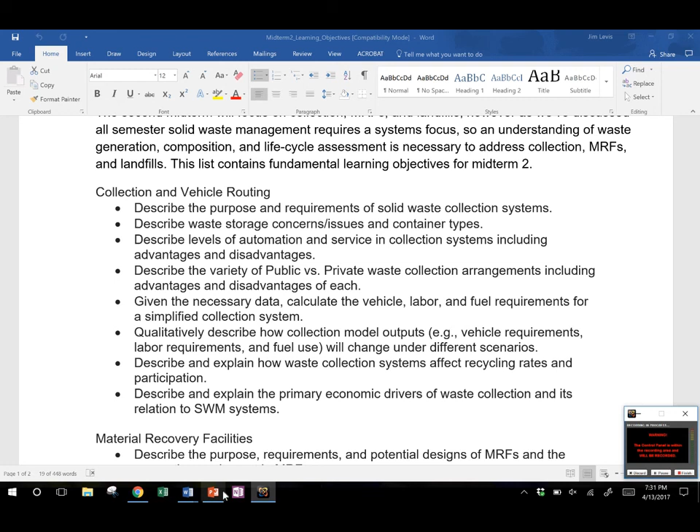The next question was on the actual practice midterm, question 4. Most refuse collection vehicles use diesel fuel for their engines, however many trucks have recently switched to using compressed renewable natural gas produced from landfill gas. So using life cycle assessment, explain how you determine whether this makes sense from an environmental perspective.

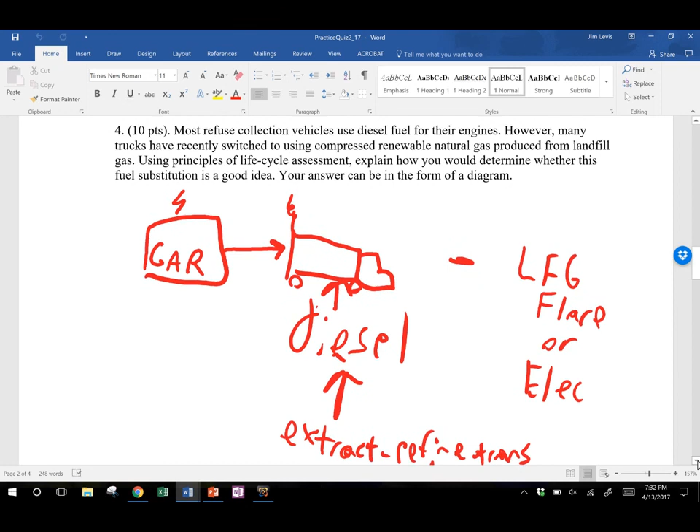It doesn't say that, but that's what we're thinking. Your answer can be in the form of a diagram, which is what we expected. So basically you want to draw the two different systems: we have our diesel vehicle, and there's some sort of garage.

For the collection system, the vast majority of the emissions are going to be fuel related. You are going to have a garage, which is going to have some electricity emissions, but then you have this diesel vehicle, which is going to have emissions from combusting the diesel. The diesel itself is produced by extracting, refining, and transporting crude oil.

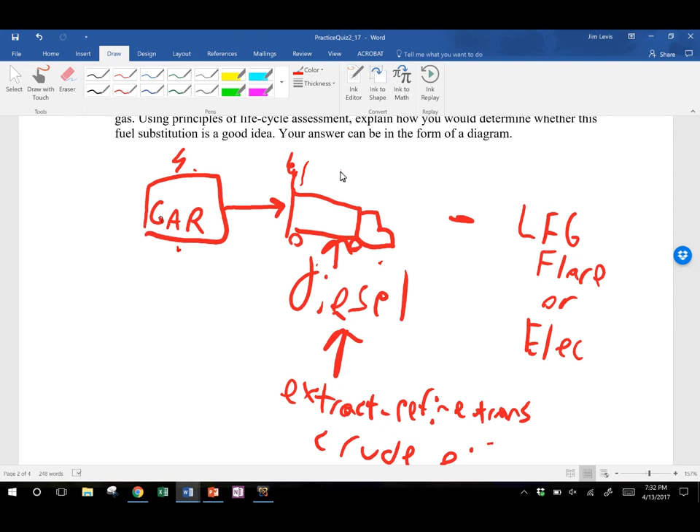Crude oil. So let's go to our other system real quick. Basically, in our other system we have the same garage, we also have a truck, and we're going to have some airborne emissions.

Those emissions are going to be different because you're burning compressed natural gas, so you're going to have less SOx emissions, less CO2 emissions, perhaps more methane emissions. And the CNG is going to come from the landfill.

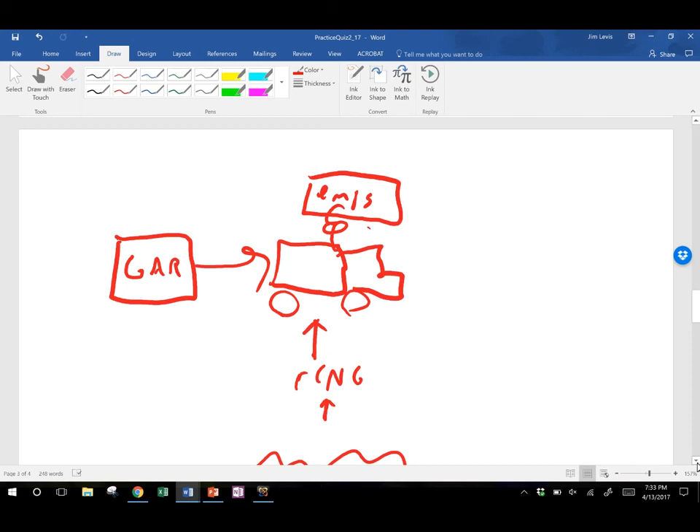This is important to think about your system boundaries. The landfill gas is going to be produced whether or not you make renewable CNG from it. So the landfill gas isn't part of this system—it's only the things that change.

So really, your gas collection system wouldn't change, and the only part that's going to change is the conversion of landfill gas to renewable CNG—you need to knock out the CO2, maybe some moisture, things like that, and clean it up. So you're going to start with what's really just a cleanup process.

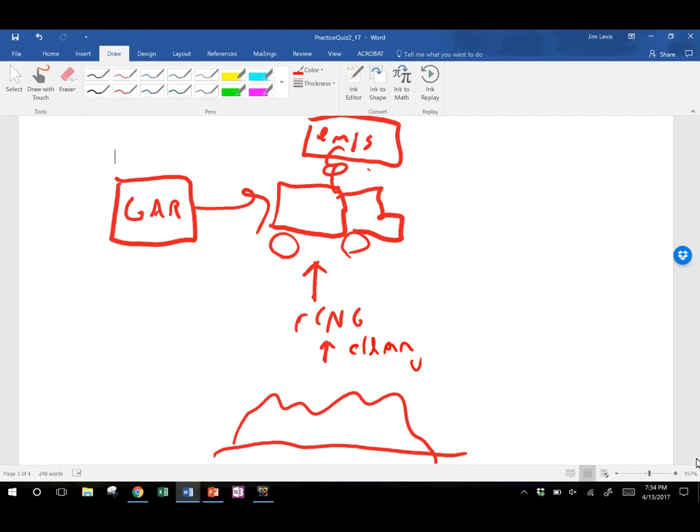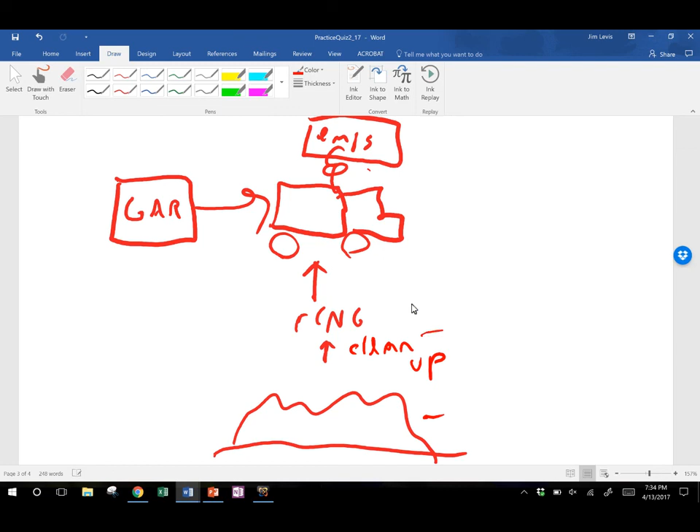The other thing you need to think about is what was happening to the landfill gas in the other system. Now we have this additional function where this system is treating our landfill gas, so we need to look at, in our diesel system, what would be happening to that landfill gas if we weren't turning it into renewable natural gas.

The two major options are, as usual, you could be flaring the gas, or more likely you'd be comparing it against another way to produce energy from it. If you're looking at producing renewable natural gas, you're probably already considering electricity production with the gas, so one of these two things is going to be an offset, essentially.

So for this diesel system, you're going to have the diesel's production, and the landfill flare or the electricity—your landfill gas is going to be treated with a flare or electricity, and the electricity would then have its own offsets associated with that. But the basic idea is that in this diesel system, that landfill gas still needs to be included, so you need to include that benefit as well.

The emissions associated with flaring the gas would then be added to this system in this offset way, because in this system your two functions are collect waste and manage landfill gas. You could do a subtractive function and then subtract these from the other one as well, from the renewable CNG one.

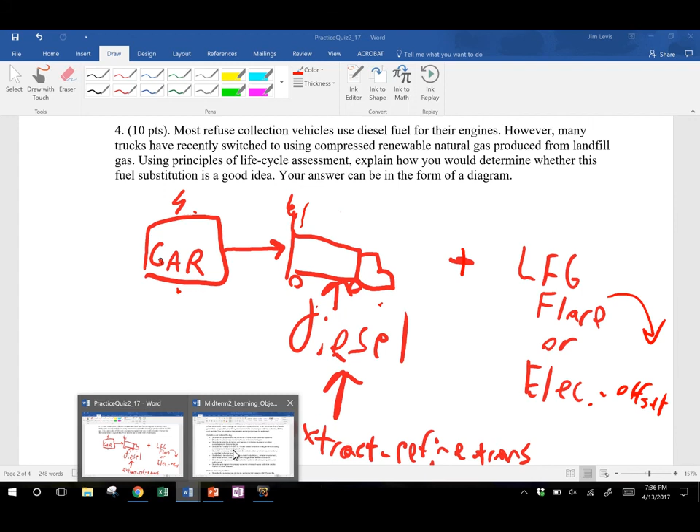The next question was on the learning objectives, trying to clarify this section: name and describe the stages of anaerobic biodegradation, be able to draw the diagram. This is specifically referring to the stages of waste decomposition in landfills: the aerobic phase, the acid phase, the accelerated methane phase, the decelerated methane phase, and the final stability phase. That's really what we're looking for there.

The other one is a bit unclear, but you should be able to do both. The stages of anaerobic biodegradation go from hydrolysis to fermentation to acetogenesis to methanogenesis, and you should understand how those all interrelate and be able to describe how those different stages work. That was a little ambiguous, but there were figures in the presentations on both, and on the midterm it will not be ambiguous which one we're talking about - we will be very explicit.

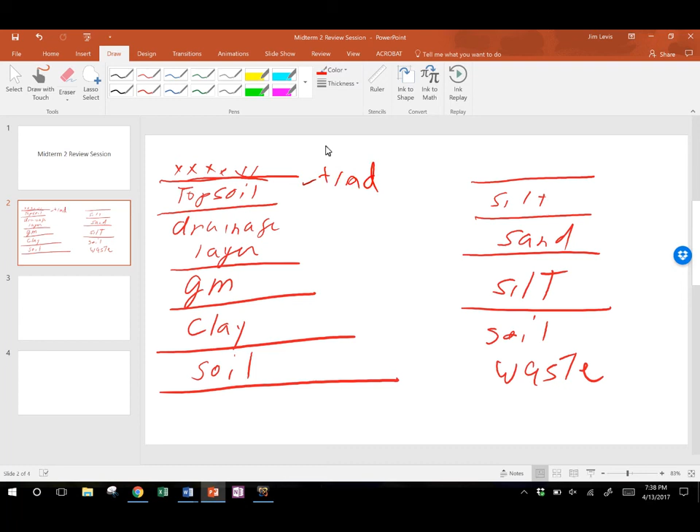The next question was on being able to draw an ET cover versus a traditional cover, related to the question on the practice midterm. This is essentially what a traditional cover looks like: you have this clay, a geomembrane, and a drainage layer on top of that, and your whole plan is to seal water from infiltrating your waste, which sits down below.

On the ET cover, basically you have this silty layer, and the whole idea is to get the soil to store the moisture until it can evaporate. These evapotranspiration covers use a silty layer that holds moisture, so you use them in arid environments. Sand, when saturated, lets water flow easily into the second silt layer, but when sand isn't saturated, moisture flows pretty slowly, so it can still evaporate.

So basically the whole ET cover uses a large amount of different types of soil in order for the moisture to evaporate before reaching the waste. These final soil layers sit on top of the waste and can be compacted easily, giving you a foundation that you can use to build up your other layers.

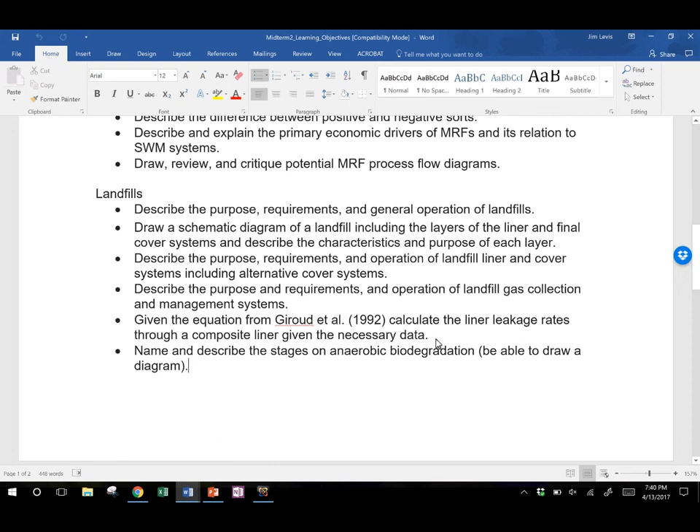The next question was on the learning objectives, basically trying to describe - and you can also show on a diagram - how pH, COD, BOD, and methane production vary through time in the stages of anaerobic biodegradation or waste decomposition in the landfill.

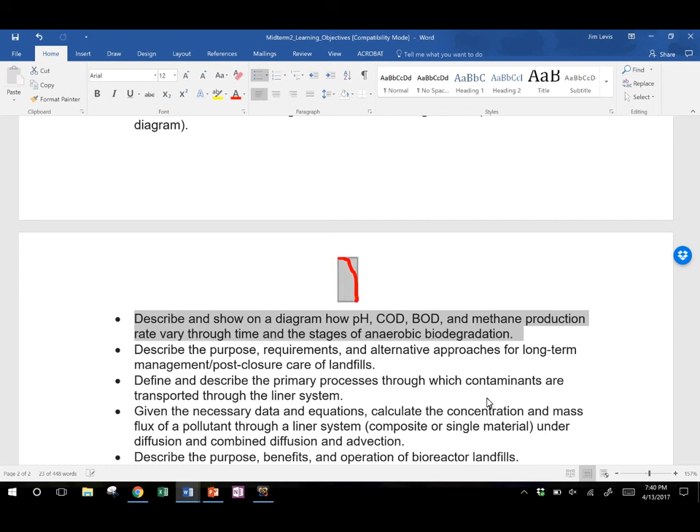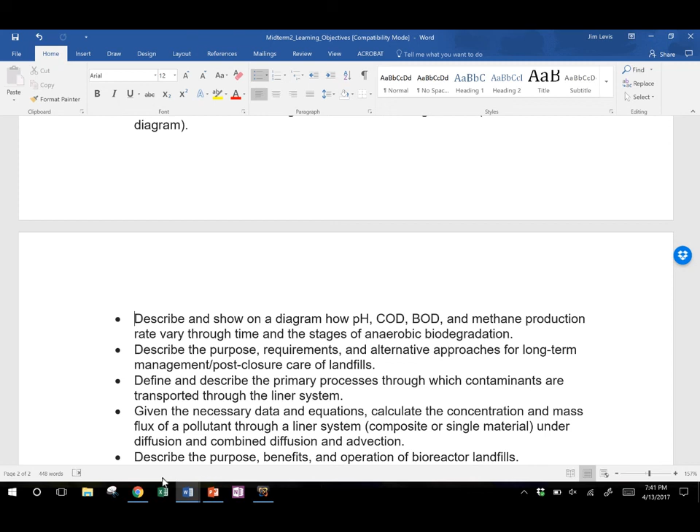Basically the idea is that for a while your acids are going to start to accumulate as you have hydrolysis and fermentation. The methanogens are going to be inhibited whenever the pH is very low, and the pH is going to be very low during hydrolysis, where the soluble monomers are broken up. Let me open this one up so we can go to the slide.

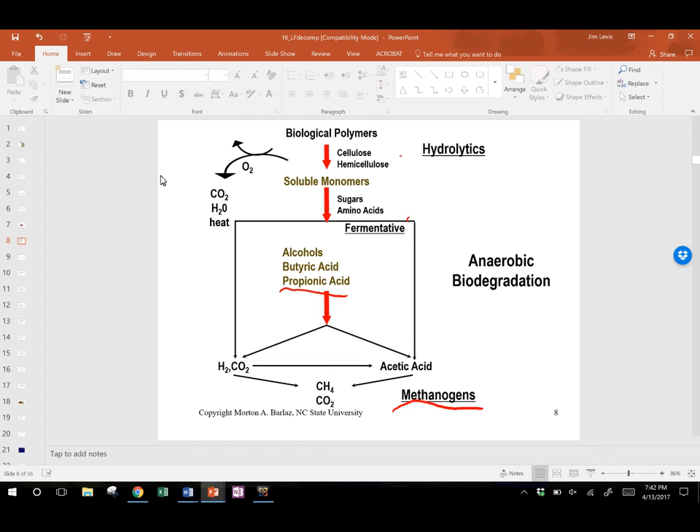It's all related to this: the idea is hydrolytics happens quickly, fermentation happens quickly, and that's going to lead to a buildup of these acids - butyric acid, propionic acid, carboxylic acid - which lowers the pH. While the pH is low, methanogenesis is inhibited, and it slowly starts up. As hydrolysis goes on, that raises your BOD and COD as you break down these biological polymers into soluble substrates to further reduce.

So that's what's happening here in your different phases: acids accumulate, and as you can see, methane production doesn't really start until that pH bottoms out. Then, as the methanogens start to consume the acids, your methane generation rate goes up and the acids are being consumed, so your pH goes back up to near neutral. During this consumption, your COD and BOD are being consumed and start to go down, hitting their peak right when the pH hits its low point.

Basically, the acids accumulate, which reduces your pH. Then methanogenesis really starts going, consuming the acids, which gets you up to a neutral pH and up to the maximum methane yield, and also starts eating away at your BOD and COD.

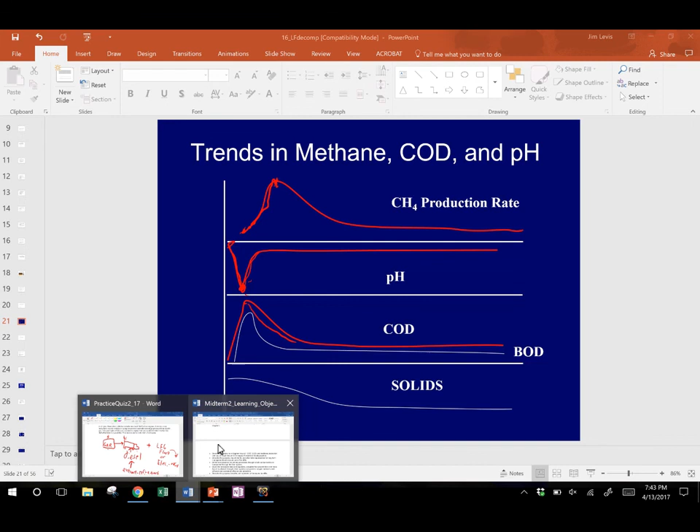The next question was on MRFs. The idea being, the question was - hold on.

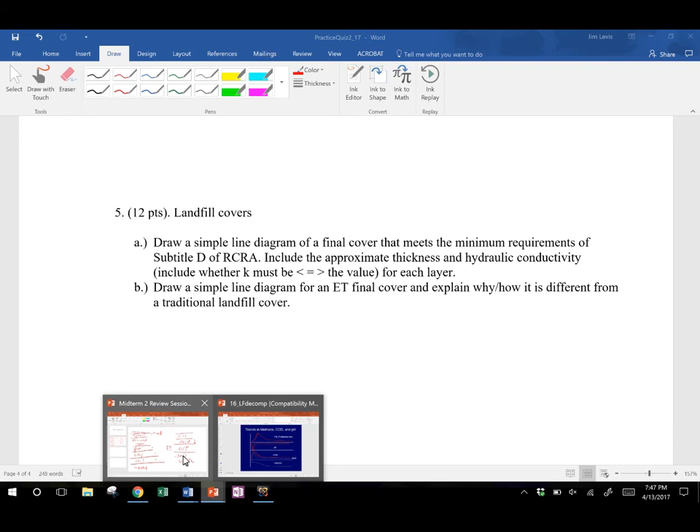Another student asked about the practice midterm, question 5, which says include the approximate thickness and the hydraulic conductivity. In the midterm it'll be clarified that only the required K values are included. The only layers that really have K requirements are your clay, which has to be less than 10 to the negative 7th, and your drainage layer, which has to be greater than 10 to the negative 2nd.

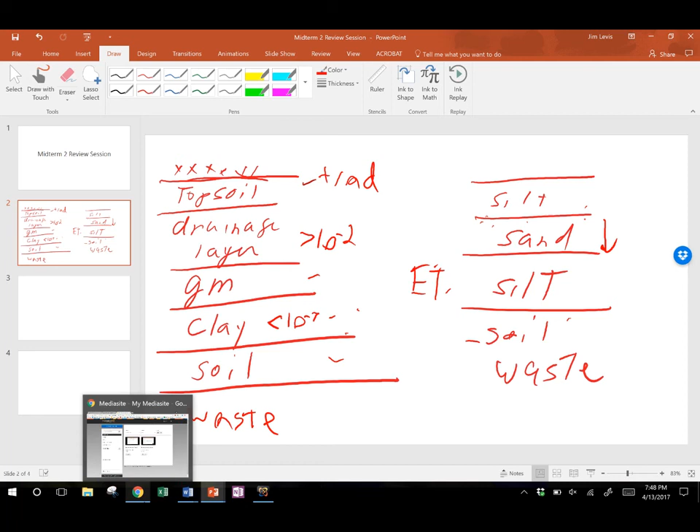This is the cover, but it'll be the exact same on the liner as well for your drainage layer and your cover. Your geomembrane is going to be significantly lower than the clay, and the other layers don't have requirements associated with them. So that's all you'd really need to know associated with that.

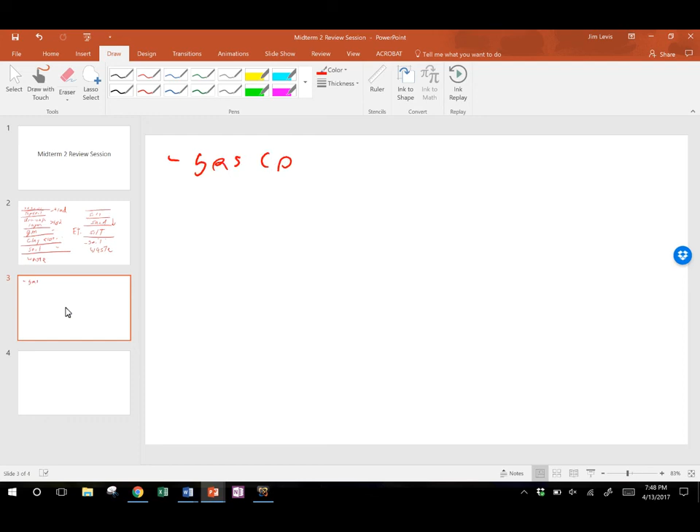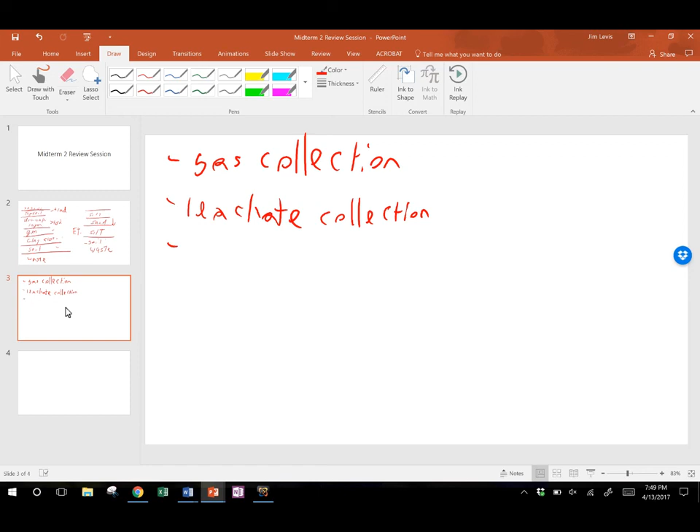Another student asked, if you're using a performance-based post-closure monitoring system, what are the 4 things you need to monitor? They were: gas collection, leachate collection, groundwater, and cover. So if you're trying to use a performance-based post-closure monitoring system, these are the 4 key attributes in your landfill that you need to monitor. What's the amount and quality of the gas you're producing?

What's the amount and quality of leachate in your collection system? What's the risk to groundwater, let's say if you quit collecting your leachate? And how is your cover being maintained? Those are the four major things you need to take a look at to see if your landfill is still a risk to the environment, and that you need to maintain over time until you can ensure they're no longer a threat to the environment.

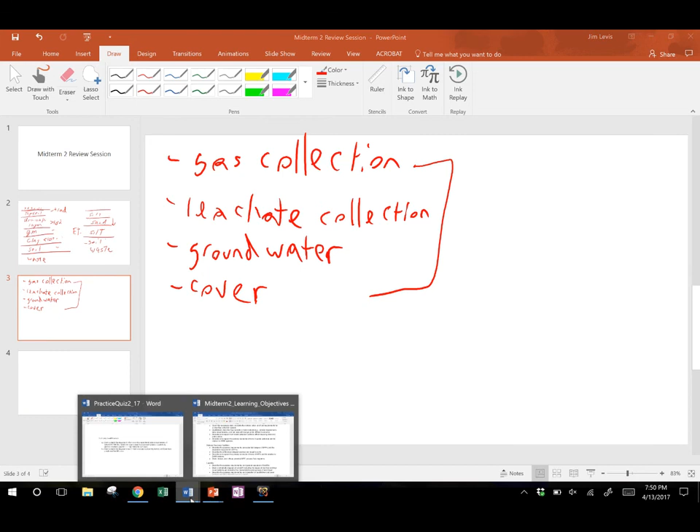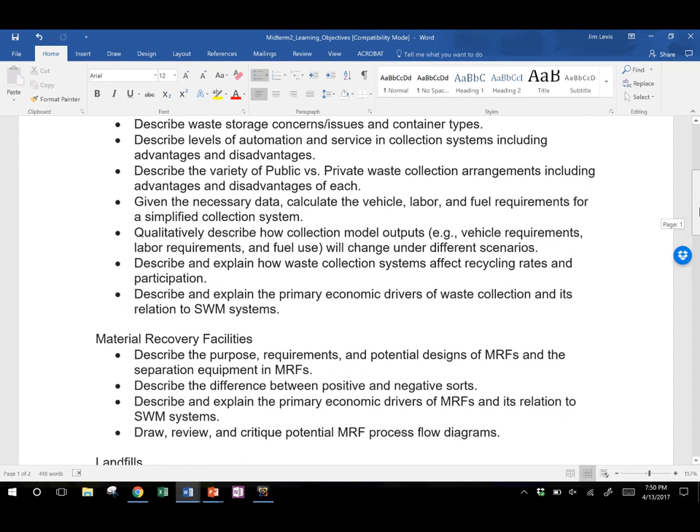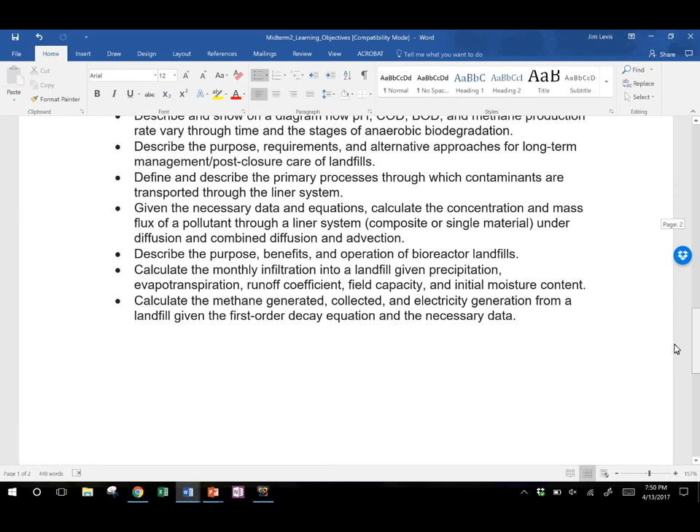Those were all of the major questions asked during the review session, from the notes that I kept. Let me look through real quick to see if there's any other ones. No, those were all of the questions asked for the review session.